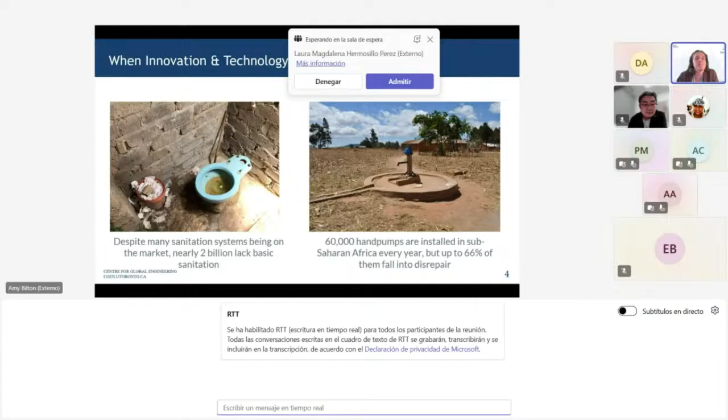When you're thinking about these types of solutions, it's really complicated. A good case study that shows how complicated and nuanced these things can be is the case of the play pump. I don't know if many people in the audience are familiar with this, but at first glance, it's something that might seem like a really great idea.

And actually that's what happened. This idea was first presented back in the late 80s at an agricultural fair in Africa, and it's quite simple. There are a lot of places that lack access to water, and a lot of places where kids also need something to do, some place to play. The idea behind the play pump was to put those two things together.

The idea is that you'd have a merry-go-round which kids would push and spin around, and that would pump water up to an elevated water tower. Later, when someone needed water, they could open the faucet, get some water, and take it home to their household.

A lot of people thought this sounded like a good idea at the time. It won some World Bank Development Awards, got funding from the Clinton Foundation, and was really well received.

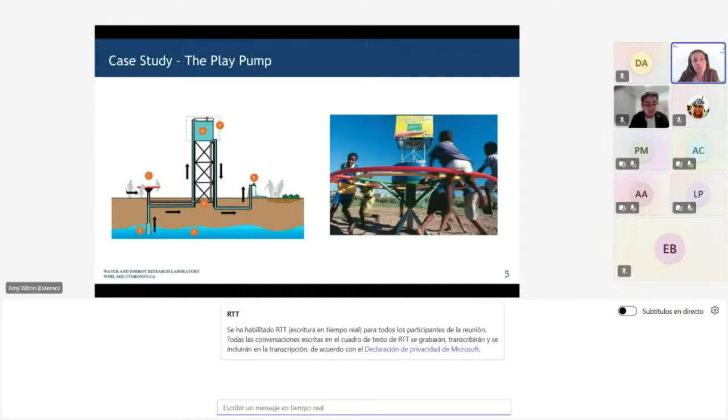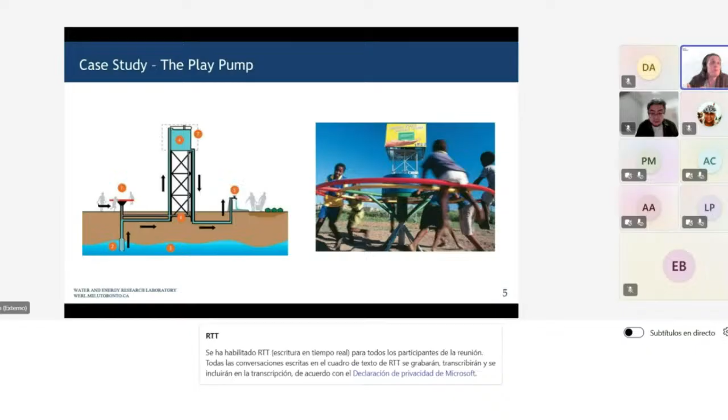From an implementation perspective, it also didn't make a lot of sense, because the kids would use it for 10 minutes a day. What happens if someone arrives at this watering point and there's no access to water? It's usually a woman collecting that water, and she would have to basically spin around a kid's merry-go-round to get the water she needed. So from a social perspective, this is very degrading and a big issue.

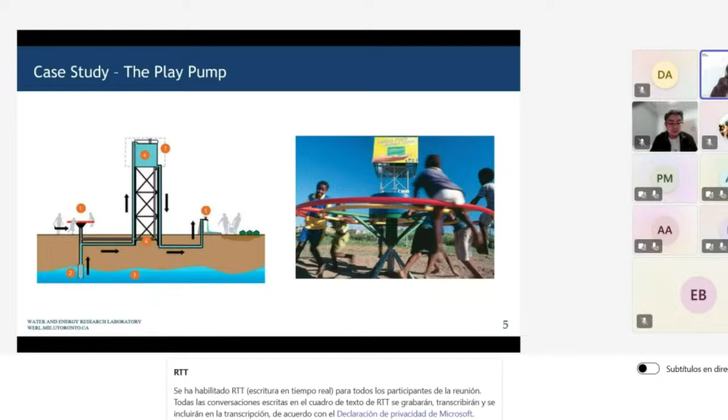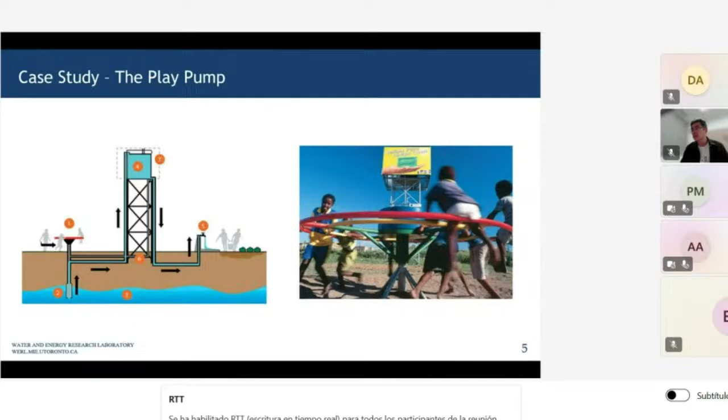There are other issues as well in terms of implementation. This was seen as a big failure in many respects - it sounds like a great idea, but it didn't really understand the full problem or consider the holistic design, both engineering design and actual implementation.

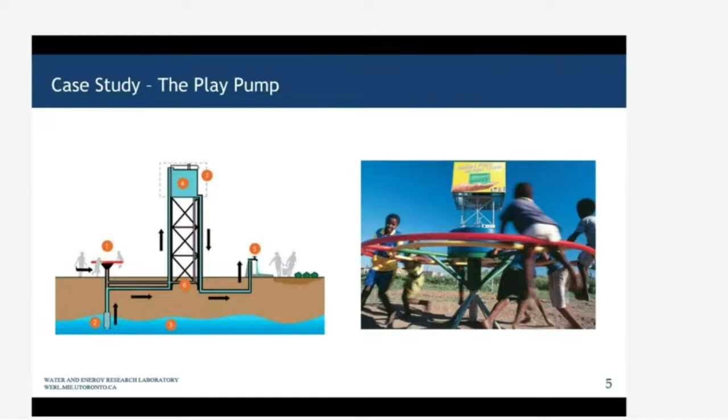So in my work, and in the work we're doing in my group, we try to think very holistically, not only about the problem and the technology, but how it fits into the particular location and structure. Many technologies which have been developed really miss the mark, and don't really address what is the core problem.

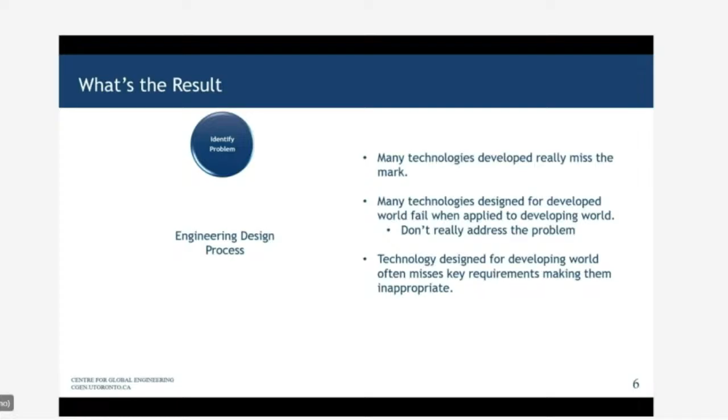So really, when my work, we think about really trying to understand fully what the problem is, and not just try to stitch something into a particular context, but really trying to think about defining that problem and being able to think about which technology has the most potential to make an impact. Sometimes that involves developing something new, which really comes from fundamental elements of that problem.

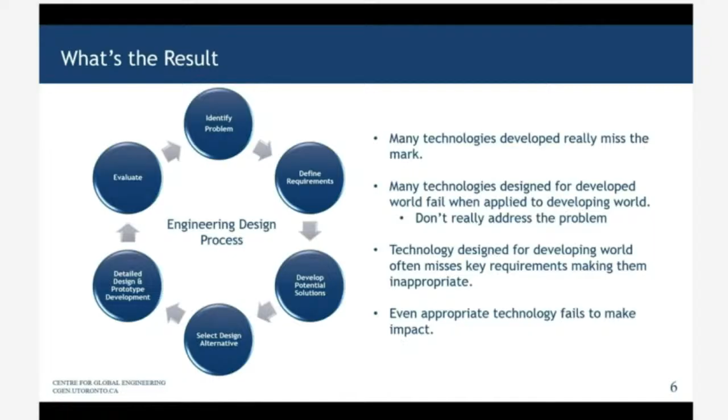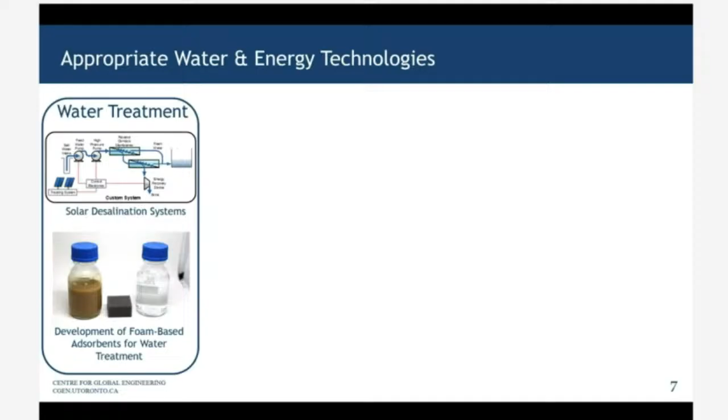My group, we do a wide range of things and work on a wide range of different technologies, from thinking about technologies for improved water treatment and materials for those types of technologies, from desalination and foam-based adsorbents, to thinking about integrated energy technologies, to how water can be used more efficiently in agriculture, and also the overall design of these types of systems in a way which is going to gear the technologies to have the most impact.

I'm going to focus in on some technologies in the last two categories in the talk today, and these are projects which are currently ongoing and things that are really our current topics within my own research group. So I'm going to start by talking about some of the work that we've been doing, thinking about smallholder farmers and thinking about using water efficiently for many of these smallholder farmers.

In the initial phases of this work, we were actually doing some collaboration with some communities down in Nicaragua. And in Nicaragua, there are communities which have very large and long dry seasons. But many farmers were actually setting up their own technologies to deal with these types of conditions.

This is an example of one of those farmers who had installed their own very simple drip irrigation, was doing some reforestation, where they had these bottles with small holes in them that were dripping water at the base, and also had set up his own diesel-powered pump to pump groundwater up to an elevated tank that then he could put through drip irrigation on his farm.

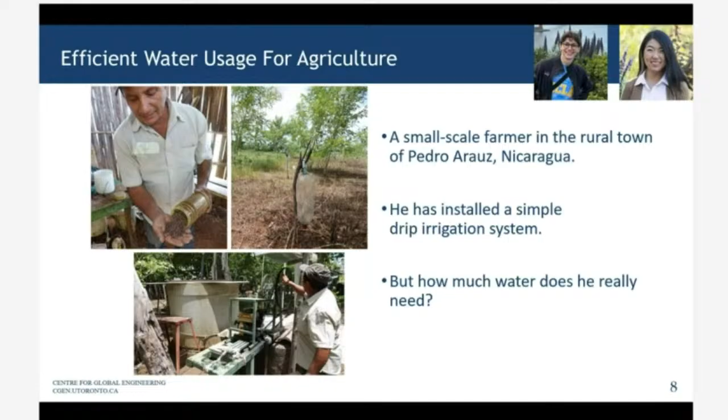This was a problem we spent a lot of time going through, interviewing many farmers in this area, approximately 50 to 60 farmers, to try to understand that context. Many of them were mostly subsistence farmers, and we're transitioning towards these types of drip irrigation systems.

They didn't necessarily have a stable access to electricity. They didn't have a whole lot of electrical tools or expertise, but they did have a lot of knowledge about how to set up and use plumbing systems in their particular farms.

So we worked and we defined this problem. And being engineers, what we'd like to do in my group is we'd like to start just really understanding the physics of what's going on when growing these crops and irrigating these crops, to see what we could think about for some sort of sustainable technology which could improve Juan's, or these different farmers', water efficiency and water usage.

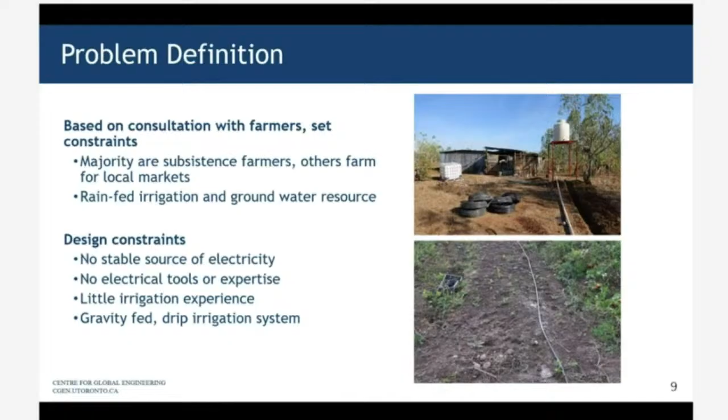And when we were actually looking and understanding the fundamental physics, we looked at what was going on in the soil. So as plants grow in the soil, they have to be able to pull the water out of the soil in order to grow. And they have to pull with a pressure which is bigger than something known as the soil water potential. So if the soil is really, really dry, there's very little water in that soil, and the plants aren't able to draw up. The plants like the soil to be somewhat moist.

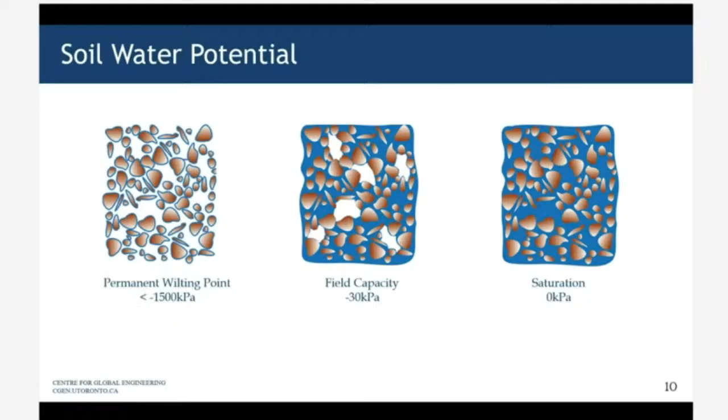Where plants usually like to grow, they'll need to be pulling with a pressure of around 30 kilopascals. And if the soil is completely saturated with water sitting on top, the soil water potential is going to be 0 kilopascals. So we were thinking about this. We learned about this property, soil water potential, and recognized that this is essentially a pressure. And we thought to ourselves as mechanical engineers, is this something that we can exploit when thinking about an appropriate technology for irrigation?

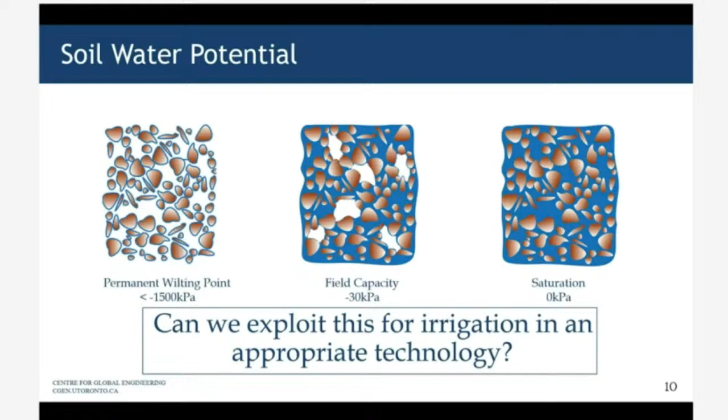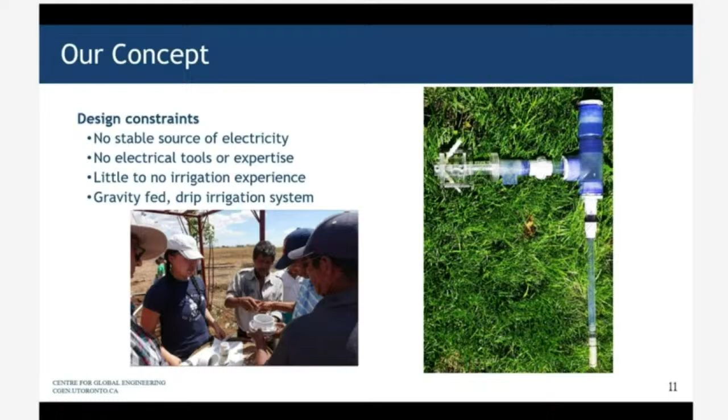One which would meet the constraints of having little to no use of electricity, no electrical tools or expertise, and just some very basic plumbing knowledge. We were able to develop a very simple mechanical concept which could regulate water usage for this particular case.

I'll show you a little bit of how the fundamentals of this technology works. The idea behind this system is that you have your irrigation system, and an irrigation controller which has this valve here, which can control the water coming from an elevated water tank to the drip irrigation network. This valve is controlled using this very simple mechanism.

What we have is a ceramic tip buried down in the soil, connected to a water column and a water reservoir here. What happens is this controller sees very similar forces to what a plant sees.

If the soil becomes dry, water is drawn out through this ceramic tip, and that change in pressure will pull back and open up this mechanism, allowing water to flow from our elevated tank to our drip irrigation network.

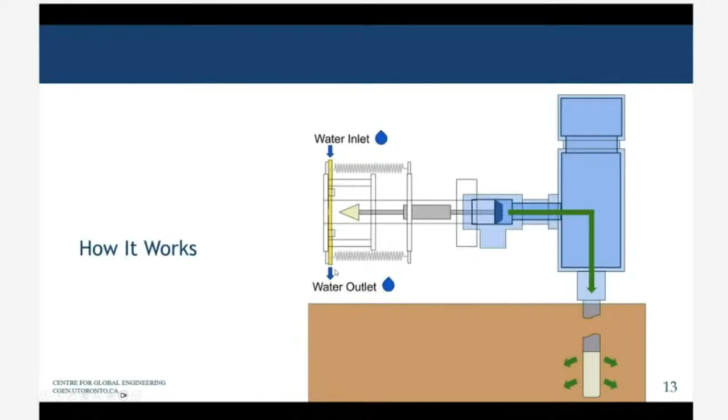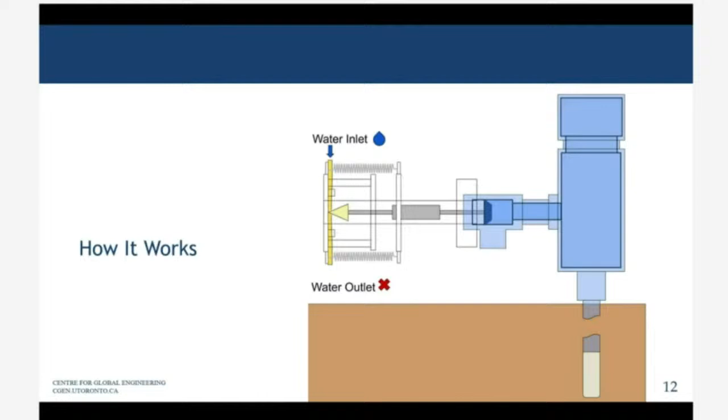When the soil becomes damp, it essentially goes in reverse, and water will flow back in, and the valve will close. So the idea is that we can create an irrigation controller which uses the same forces a plant sees to regulate water flow into the irrigation network.

We're in the process of actually building this out right now, showing its efficacy and doing some work with farmers to understand how this would be adopted.

This is showing some of the testing we've done. This is the first testing, done in a greenhouse in Toronto, where we installed the controller and compared its usage to a simple timed irrigation network and timed irrigation system.

This plot on the left shows the basic operation of the system. As the soil pressure goes down, the controller pressure also decreases, the valve opens, water flows into the soil, and the pressure goes up, closing the valve again—this pattern regulates water flow into the irrigation to match the crop's needs.

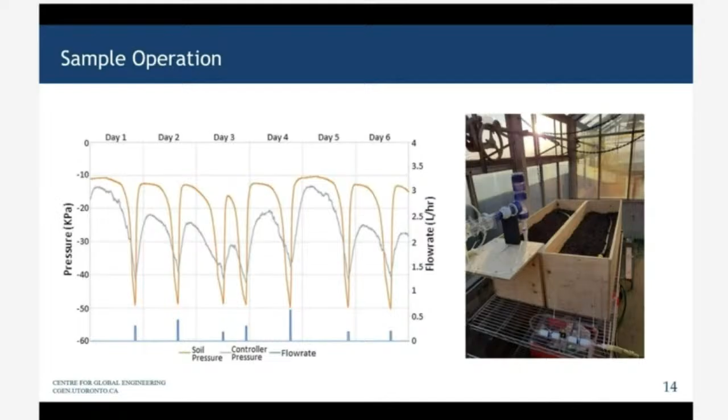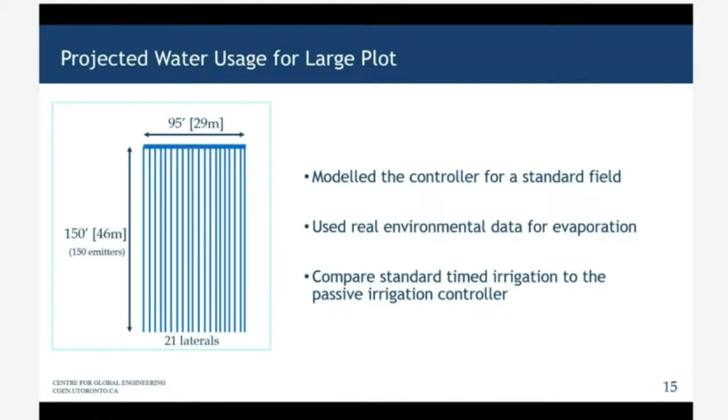We've also done studies looking at what happens when we take this out to a larger plot and compare it to standard timed irrigation. We took real weather data from a site in Toronto and did this comparison between timed irrigation on the left and our passive irrigation controller.

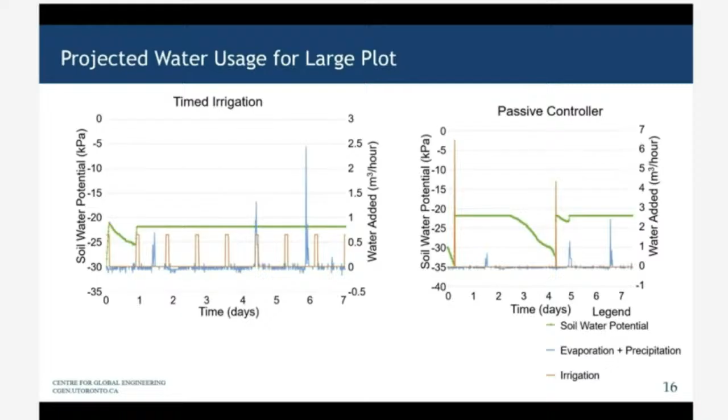You can see in this case there was actually some rain happening at the same time. Our irrigation controller over this course of 7 days only had to open 2 times to maintain soil moisture, and was able to save about 75% of the water usage over what the farmer at that site was doing with standard timed irrigation.

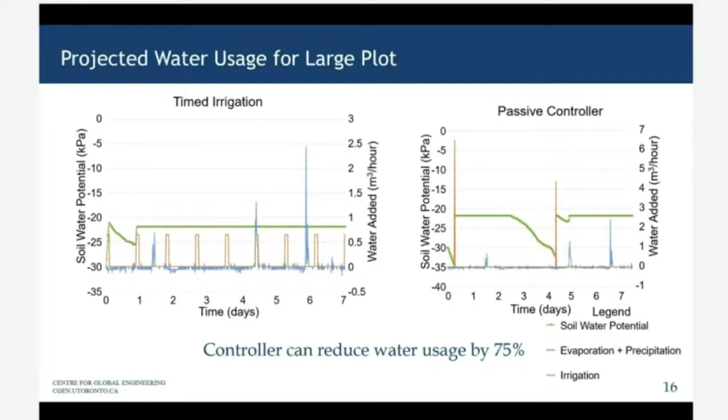So we're in the process—this is a project currently ongoing within my group—of refining the design of this valve and doing some things to allow adjustments in the operating pressure, as well as planning for a local field test.

We've also developed a partnership with a UN agency in Morocco which does work with farmers. We will do a controlled field test with that UN agency to assess performance, as well as adoption studies with farmers to understand their opinion of the design and what barriers might exist towards farmers taking up and adopting a design like this.

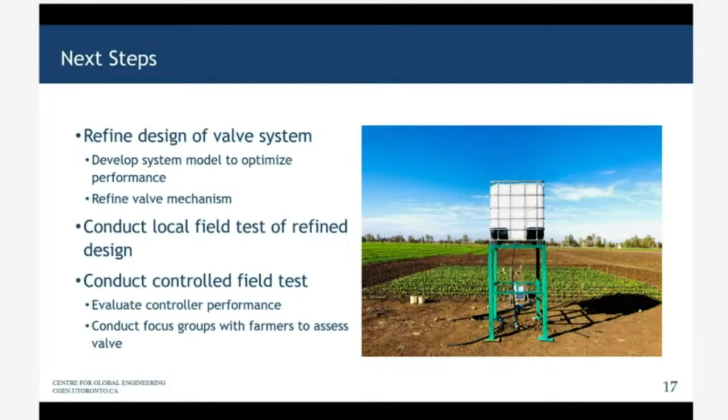So this is an example of one of these types of projects we're doing in our group. Now I'll talk about another project going on within my group, which is looking at sustainable sanitation.

This is some work of a recently graduated PhD, Pablo Cotara, who was thinking about sustainable sanitation for sites, working with many communities, including in Mexico, which lack piped water and sewage. This is a picture he took during his own field work in and around Mexico City.

In Mexico City, there are many places like the one in the image that Pablo shared here, which lack piped water and sewerage and are actually prone to flooding because of the high groundwater table, and also have relatively high medium to high population density. So this is a challenge for these sites without piped sewerage.

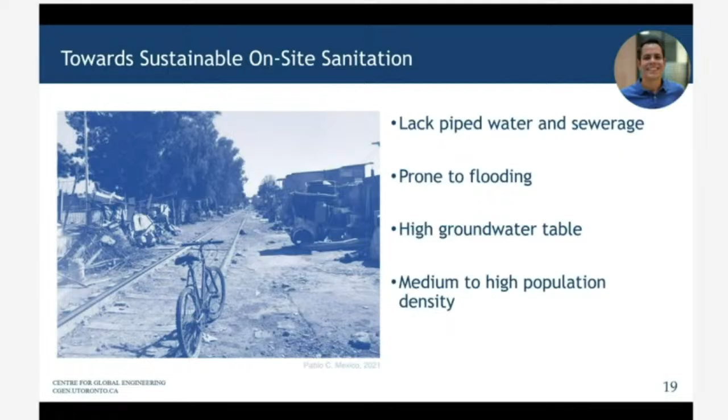So he was exploring whether dry toilets could be a feasible sanitation solution in these particular sites. Through some of his initial feasibility studies, he saw maybe it could make sense.

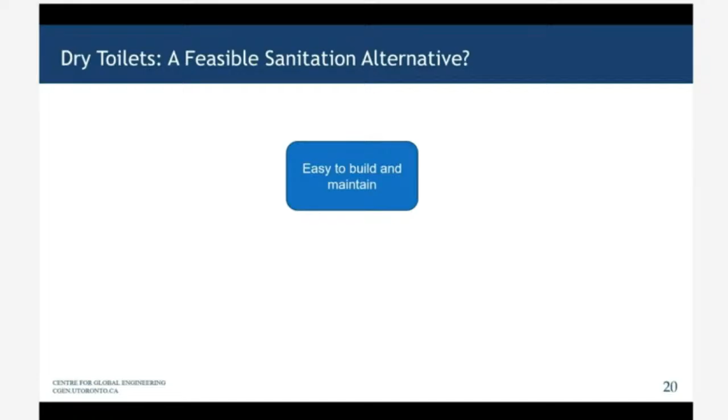These types of dry toilets, and I'll show you a schematic of what we were talking about in a moment, could be easy to build and maintain. If there's a dry toilet, it doesn't need any flushing water, which is critical in a place that doesn't have piped water. There could be some local availability of the dry materials needed. You could think about managing the actual waste from the dry toilet, either on-site or potentially off-site.

And we could think about taking the output of the dry toilet and activating it through composting, which is something that could also be done somewhat locally.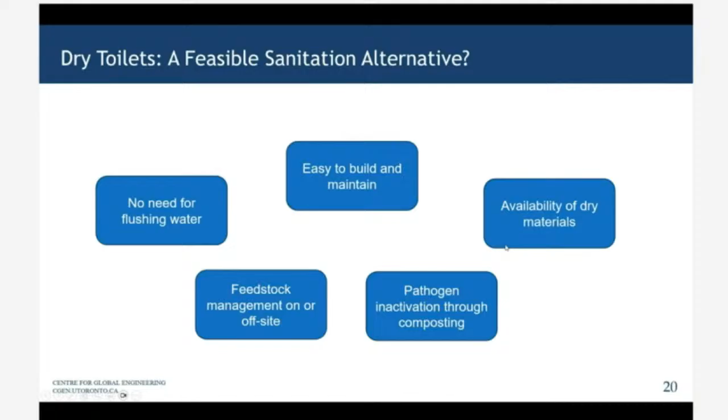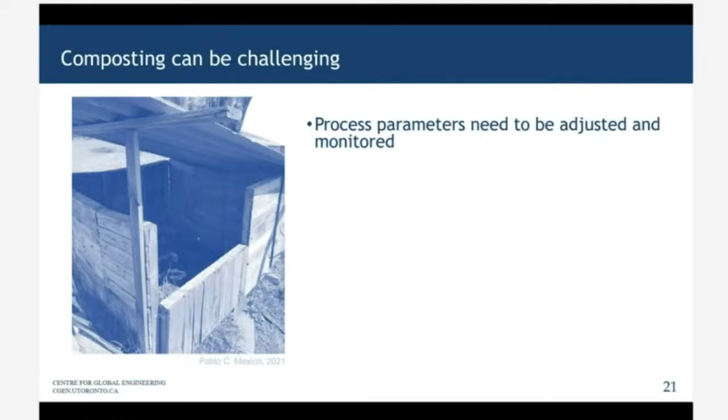So part of the challenge in implementing these dry toilets, if we were going to put all these pieces together, is that composting can be challenging in this type of environment. These environments can be pretty dense, and a lot of times the process parameters need to be adjusted and monitored to get the temperatures you need for pathogen inactivation. To get that type of temperature, you typically need something quite large, which would require a lot of stakeholder engagement and potentially long times for pathogen inactivation.

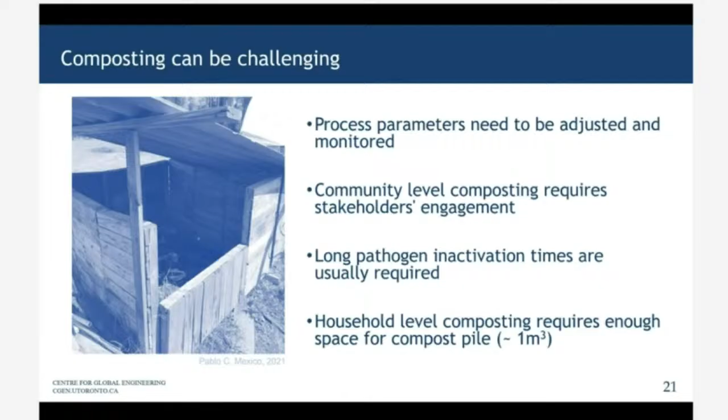Traditional guidance and literature says that for this type of composting for dry toilets, you would need a compost pile about a cubic meter in size, which is really big. In many of these population-dense areas, that could be a potential challenge.

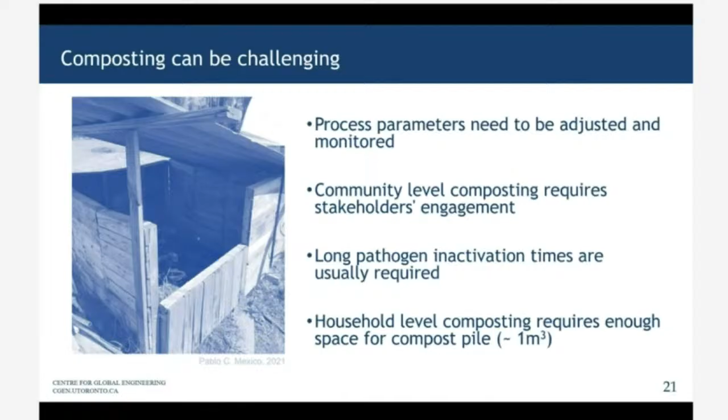So we thought maybe dry toilets could make sense, but this was a big barrier — the fact that if we were going to achieve pathogen inactivation in the waste from the toilet, having these big compost piles was a big barrier.

So this is the structure we were thinking about, and we wanted to see if it's possible. Can we think about a structure where we could have a toilet that would look something like this? The idea is that you would have your toilets structured in a certain way so that when someone used them, the feces would go into one container. There are existing structures within the toilet bowl that enable relatively good separation between urine and feces, so you could have the urine in one container and the feces in another.

Potentially we could think about using something that would be about 60 liters, which could work quite nicely for a household in terms of the amount of time you would need to manage this and the frequency needed.

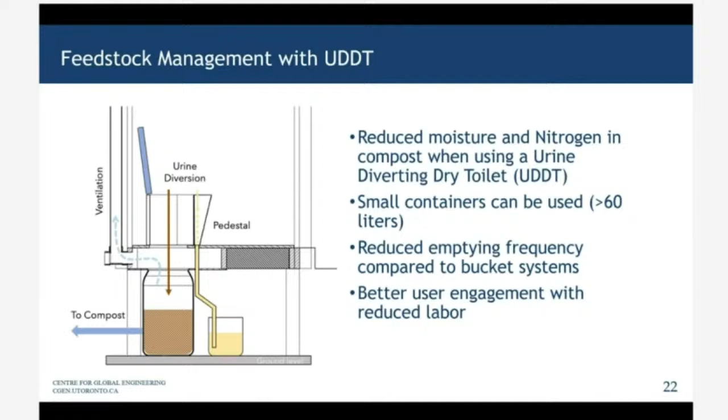But the problem is that if we were going to use a structure like this, most of what literature said and showed for reaching pathogen inactivation in this type of composting relied on volumes of about 1,000 liters. We wanted to see if we could do something in the volume of about 60 liters.

And we wanted to see if we could get it into a range to achieve pathogen inactivation. What we wanted to do in the composting process is get the temperature high enough for long enough that it kills off the dangerous pathogens that could exist in the feces. What has been shown in literature is that to do that, you need to get high enough and long enough to be in the top right-hand side of this image here on the left.

To safely get into this image, we chose a design requirement that we could hit: if we could reach 1 day at 50 degrees C, we'd be in a safe zone for successful composting at smaller scale. So in this research, we wanted to see, could we get this compost from 1,000 liters down to 60 liters?

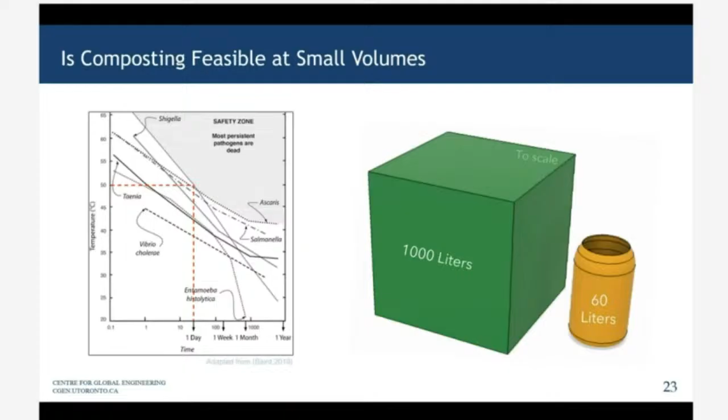In order to do that, we started with something quite fundamental, breaking it down while also wanting to make it accessible. So we developed an analytical model, which was quite simplified, and we wanted to see if this could help guide us.

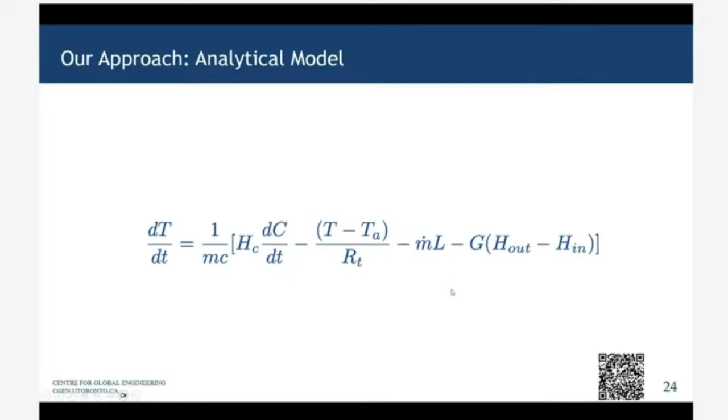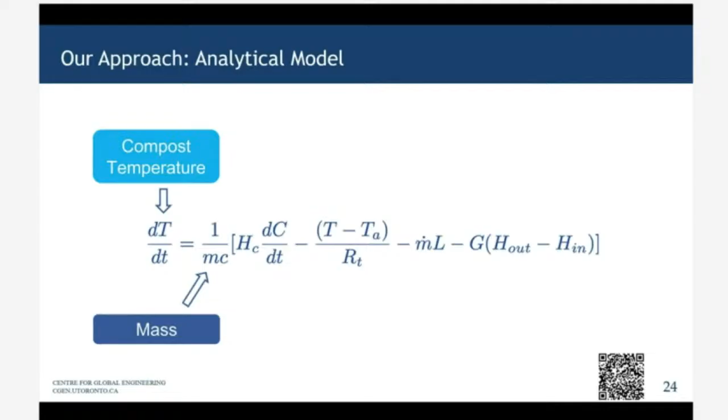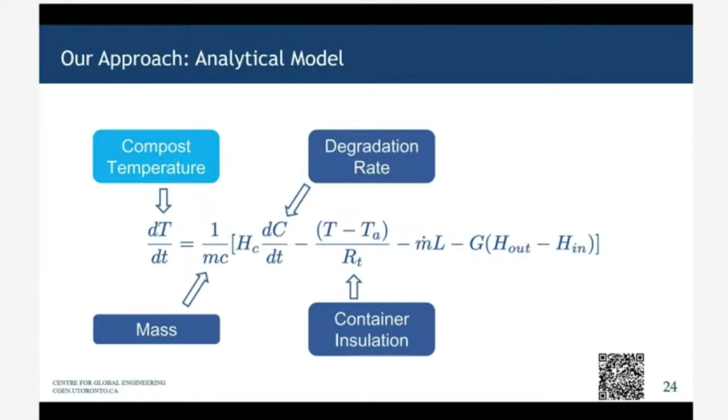Toward getting this type of small compost reactor, which would open up this dry toilet technology to the household scale. This model, shown on the slide, is quite simple. We're looking at the individual terms to understand the compost temperature and the rate it changes, as a function of the mass of compost, the degradation rate, the container insulation, the evaporation rate of water from the compost, and G, the aeration rate - how much air we're putting into the compost. We boiled it down to this relatively simple equation to understand whether we should try to size this down.

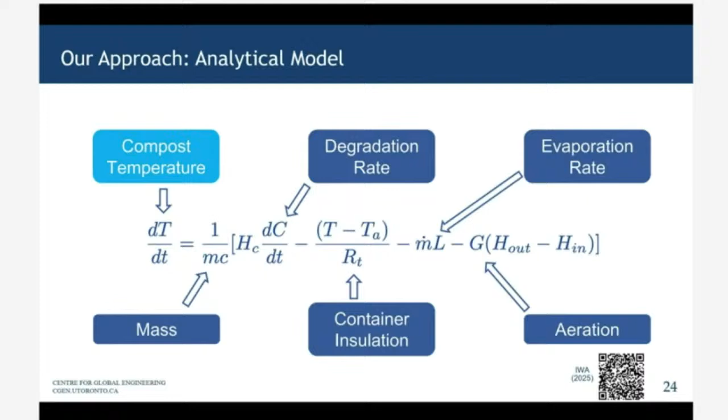This is a relatively simple equation, but there are a lot of unknowns in it. So we also set up a small experimental setup to understand this model and see if we could characterize what some of those variables were in our equation overall.

This figure shows the experimental setup. On the top left is our compost reactor, filled with feces and some dry material like sawdust. We installed temperature sensors throughout the depth of the compost, and to provide aeration we had a pipe going down through the center, driven by a very simple computer fan.

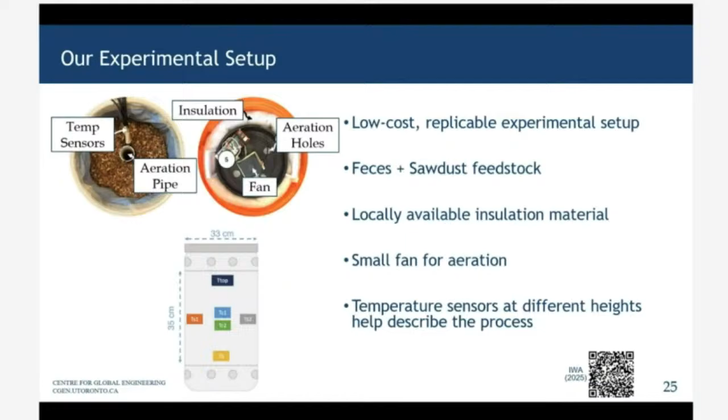With this model, we ran the small compost reactor in a relatively small experiment, wanting to see how small we could make this mass while still reaching that safety zone of 55 degrees C for 3 days. We started with smaller experiments, running one with about 2.4 kilograms, a certain insulation on our container, and a certain airflow rate for aeration.

We ran those experiments and used the data to fit our model. The experimental results are shown with the gray line here, and our fit is shown with the black line along with some bounds on uncertainty. The model is able to fit this relatively small volume quite well.

But then we wanted to see if we could use this model to understand where we wanted to go. If we wanted to reach 55 degrees C for 3 days, what would we need to do? So we adjusted our parameters in terms of mass, thermal resistance, and aeration rate, and predicted where we wanted to go.

We predicted, and then actually ran that experiment where we predicted we wanted to be, to reach that 55 degrees C for 3 days. We predicted we needed to go up to just over 5 kilograms and reduce our aeration rate to get those pathogen inactivation conditions.

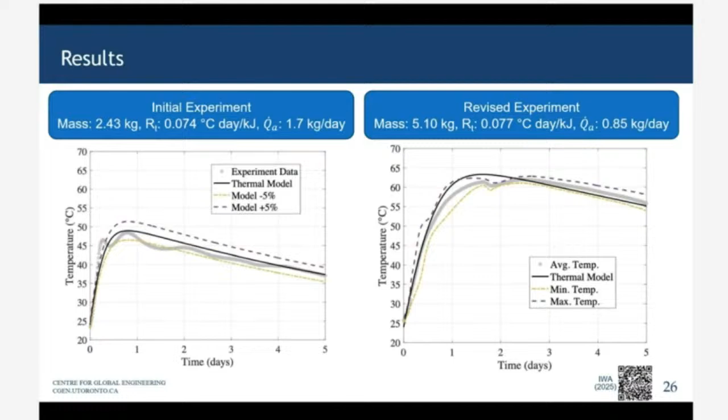The figure on the right shows that the model for these other conditions also matches pretty well, and with those conditions we were successfully able to achieve pathogen inactivation with a relatively small mass and volume. This is the first time, with a very simplified case and very simplified equipment, that we've been able to do this kind of small volume, accessible composting for dry toilets.

So we are actually working to think about how we can translate these results to different agencies, to think more about the design of these types of dry toilets.

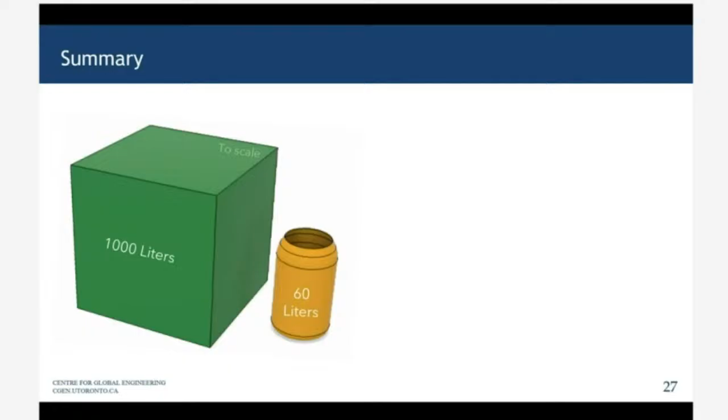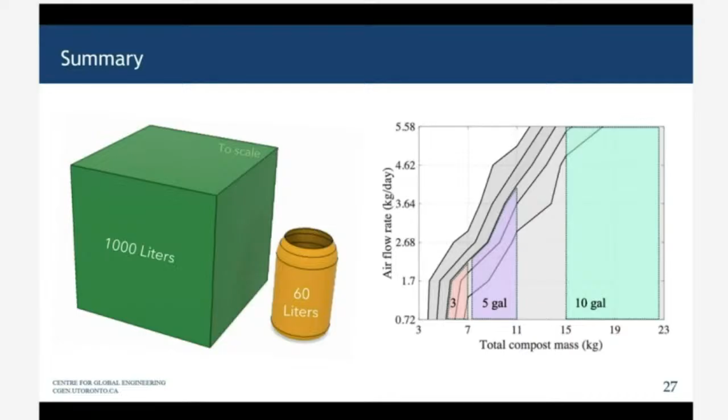And we've also done a range of studies to try to understand what are the design bounds on different sized reactors and aeration rates, to be able to have feasible configurations of these dry toilets that will meet these pathogen inactivation conditions.

I'll touch on one last example of a project currently going on in my group before taking questions. This project is really about closing the design loop, thinking more about technology after it's been developed, how it's being used in a particular context, and if it's being appropriately adopted. This is a project supporting an organization in Mexico called Isla Urbana, thinking about how we can ensure technology is adopted in the best way.

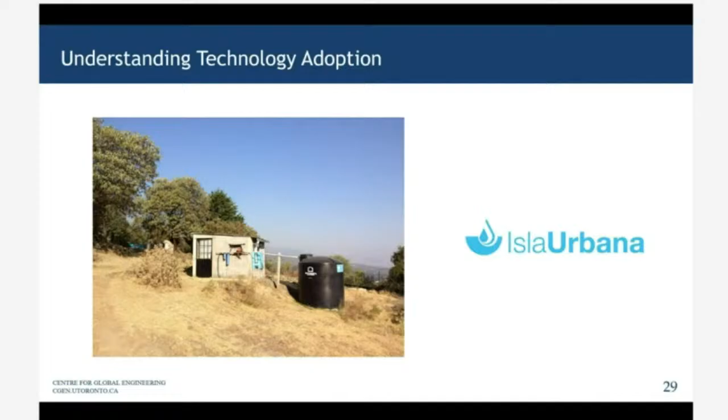This work really began a few years ago with one of my other students, Sacha Rizante. We were doing some work on different agricultural technologies at that time, and we wanted to think more broadly about this question of adoption. There are a lot of people developing technologies out there, like the irrigation controller I was just talking about, but we don't want to just develop a technology for the sake of developing it. We want to develop a technology that's going to be used and have the most impact.

In Sacha's work, we tried to understand whether there are trends in terms of different factors that influence whether someone adopts a technology or not. We started by going through data from the literature on agricultural technologies, looking at things like the demographics of adopters, and the financial conditions of potential adopters, to see what influences whether someone uses a product long-term.

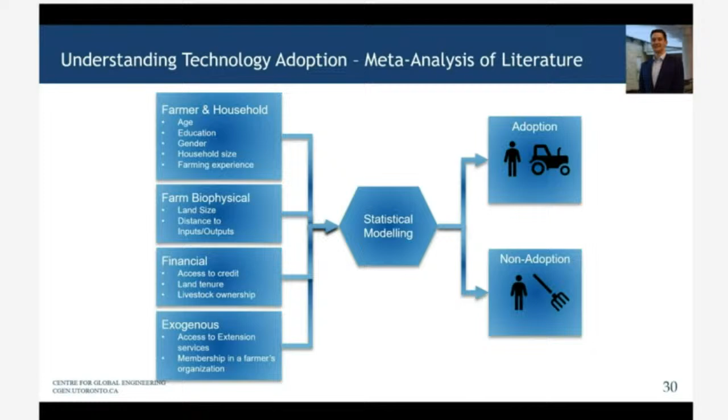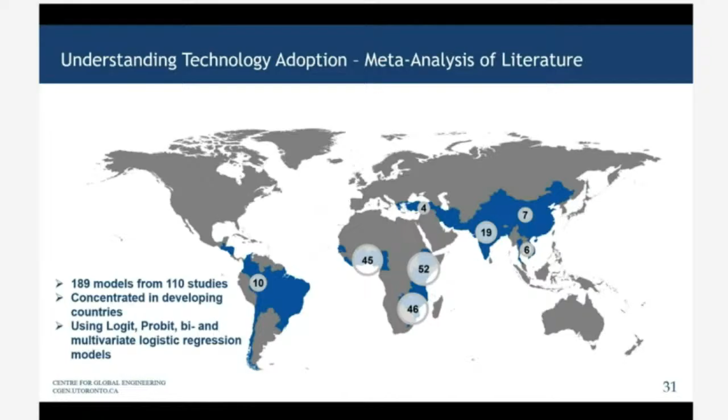We did a number of analyses on these studies, looking across different technology categories, different geographies, and different socioeconomic factors as well. Part of the challenge of doing this work was that we needed some way to put all these different factors together and look at the influence of the factors on the potential of being adopted.

To do that, we developed something called the odds ratio - a ratio where, if it's greater than 1, the probability of adopting is increased if some condition is true. For example, if someone had 5 years more education than the average, would the probability of adopting be higher? Yes, there was some influence in terms of that factor.

But across all these different factors, we found some small relationships between different factors and the probability of adopting particular technologies. There's a small relationship between access to credit and adopting technology, and between land ownership and adopting a technology. But the biggest factors were whether someone had access to extension workers - people who would support implementation of the technology - and whether they were members of a farmers organization or other organization where they might have support.

So we found some factors had more probability of adopting a technology, but overall the relationships were not super strong, and really it was the context which was the most important piece.

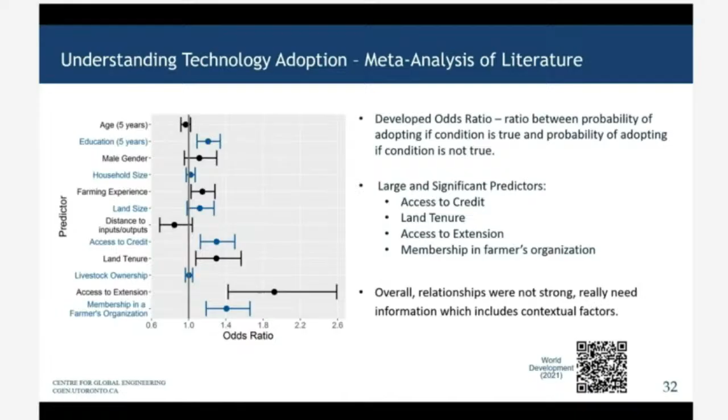We've taken this to start thinking with some partners about going more in-depth on technology adoption. Since contextual factors are so important, we've been zeroing in on particular technologies and contexts - that's what we've been doing alongside Isla Urbana. This is some work of students Erin Rudy and Adriana Patino, really thinking about water access within Mexico.

I started off the presentation talking about UN Sustainable Development Goal 6, and in Mexico there's a significant number of households which are lacking sustainable access to water.

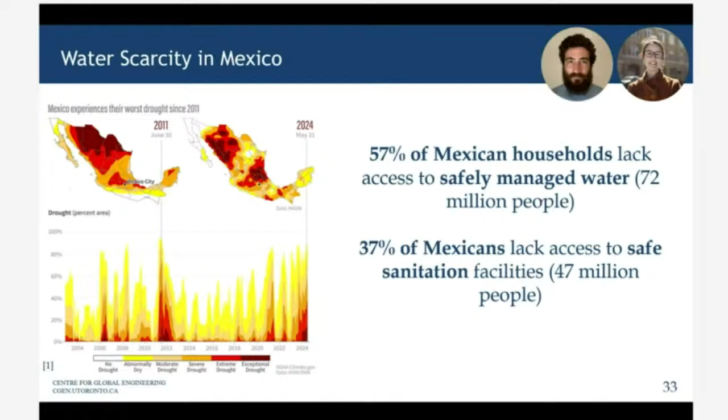In this context, there's been a push to think about the potential of decentralized infrastructure. In Mexico, a lot of households rely not only on intermittent pipe systems, but also on trucked water and bottled water. But there are challenges there.

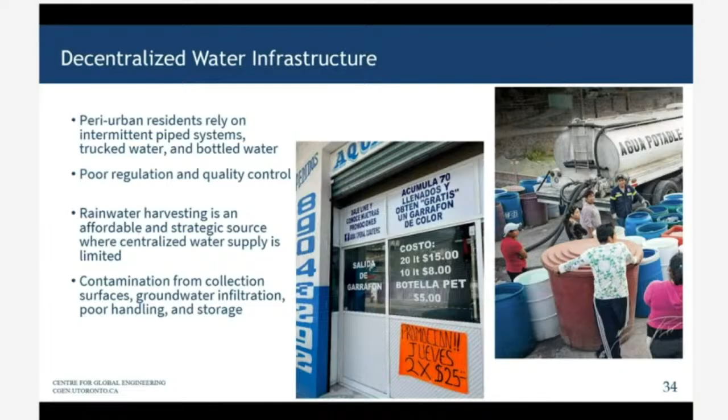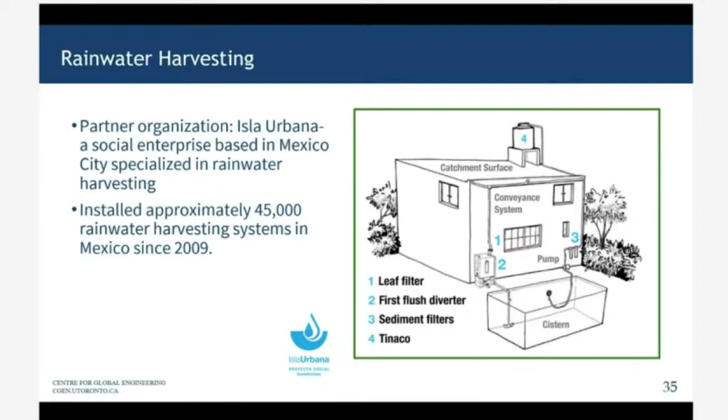We're working with Isla Urbana to understand more about adoption within projects they've done. They've been working in the state of Jalisco, near Guadalajara, and have installed over 8,000 rainwater harvesting systems in the past several years. We wanted to work together with them to understand what's happened since they installed those systems a couple of years ago.

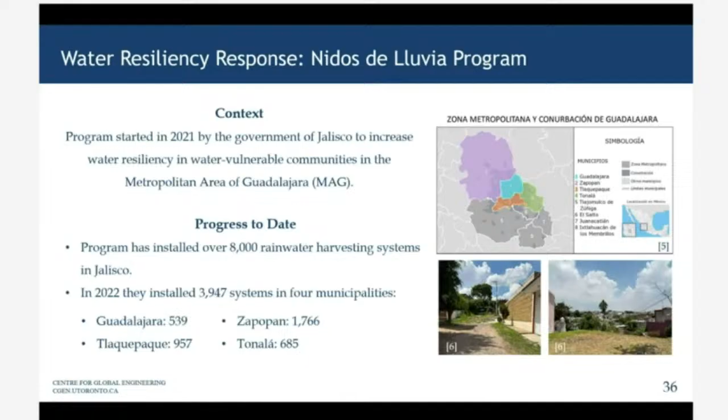We wanted to understand a few things: are the systems still being used? What are the perceptions of the users of those systems? And also trying to understand more nuances about what the household's knowledge is of those systems, and also the quality of the water actually in those systems.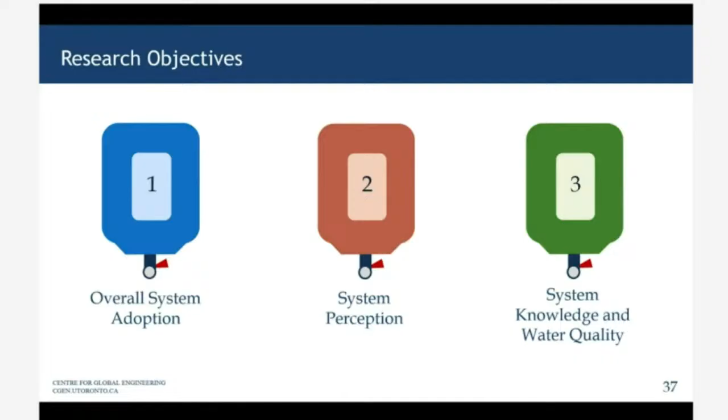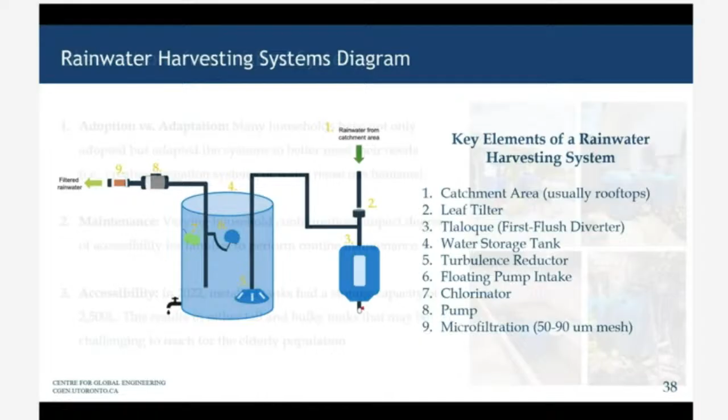The questions were about whether households had adopted and were still using the system. We found that many of the households were adopting these systems, but there are different levels of actually adopting. Adoption is not something which is only binary, which is often talked about in the literature.

Many households, and really what would be considered the people using the systems best, had not only adopted the systems but had really adapted them, changing them to meet their own needs, creating other mechanisms to reuse some of the water from the first flush diverter and other elements as well.

We also found, as mentioned, that adoption is not necessarily binary, and there are differing levels of maintenance in many of the households. Sometimes this was a result of the fact that some of the setups were not necessarily super accessible. Some were rather tall and bulky, and those were things which would be challenging for some of the elderly population to actually maintain.

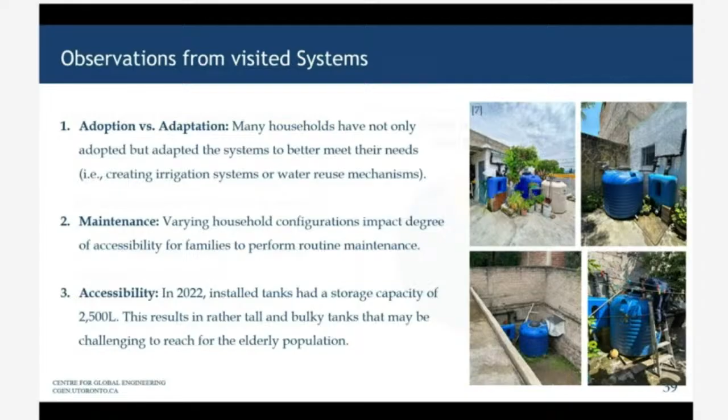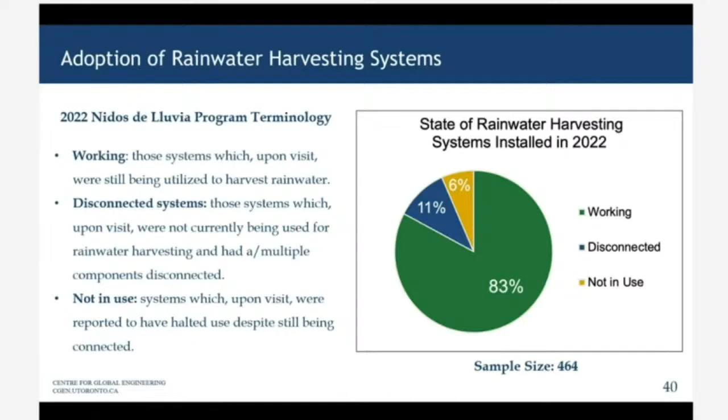Looking at the results of the overall survey, we did find that most of the systems were still set up and still working, still being used to harvest rainwater two years after installation, which is great, so these would be considered as being adopted. For the ones that were disconnected, most households said it was because they were in the process of doing some remodeling or changing things around their house.

One thing we found when looking through these systems is that there was a lot of variation in the quality of water harvested. We wanted to understand more about the factors influencing how well someone was using and adopting the system. We classified the different quality of water using a visual assessment, and you can see the distribution here. There were some households with very clean water, but across a spectrum of overall water quality in the storage of these rainwater harvesting systems.

We wanted to understand a little bit, at least from our survey, about what might be influencing the different usage of these types of systems. One of the things we asked in our survey was about the knowledge of the system. We asked people to describe to us how the system worked, and we found some very interesting results.

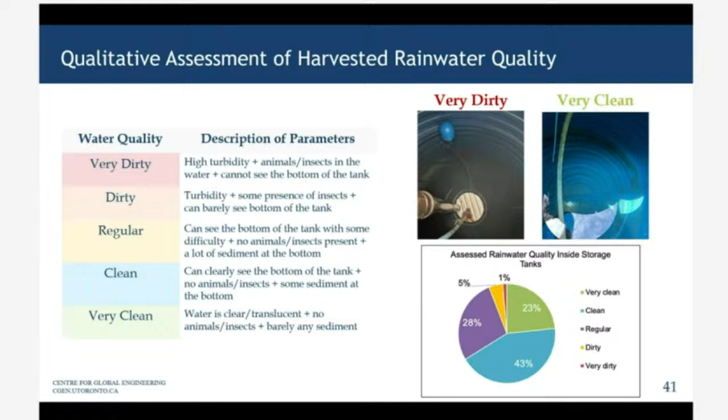We found results that showed there is a correlation between knowledge of how the system works and the actual water quality in the tank. We found this using a chi-square test, where the figure on the left would show if there was no correlation between knowledge of the system and water quality. But the figure on the right is what we actually had.

If you take a look at some of the data, this dark blue line represents households which had correct knowledge of how the system worked. You can see very little—there were no households with very dirty water, and maybe one household with dirty water. Most of those households, for people that knew how to correctly describe it, were clustered toward higher water quality, versus households with incorrect knowledge, whose distribution was skewed more toward dirtier water.

So after going through and doing the statistical analysis, we ended up with a statistically significant correlation between knowledge of the system and water quality.

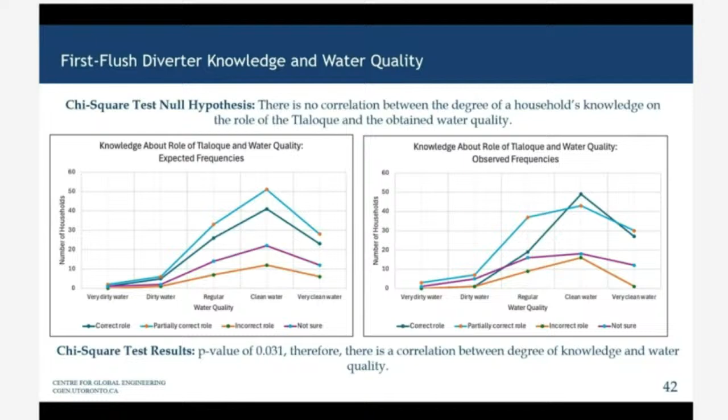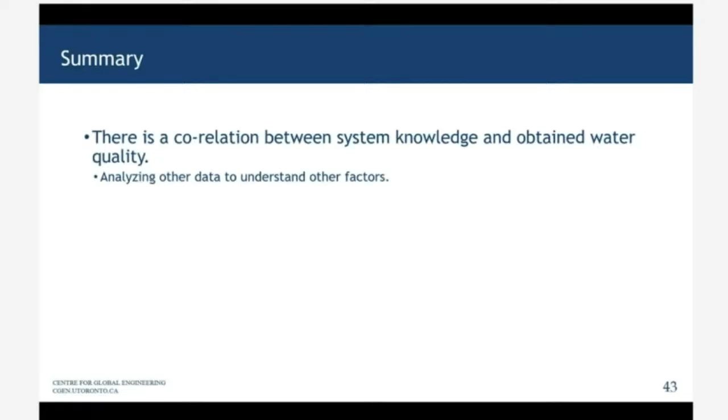So we're thinking more now with Isla Urbana about how we can take this to the next step. We're analyzing some of the other data within the survey to understand what other factors might be related to water quality. There's also a desire to understand how different training and design influence adoption and adaptation of these systems.

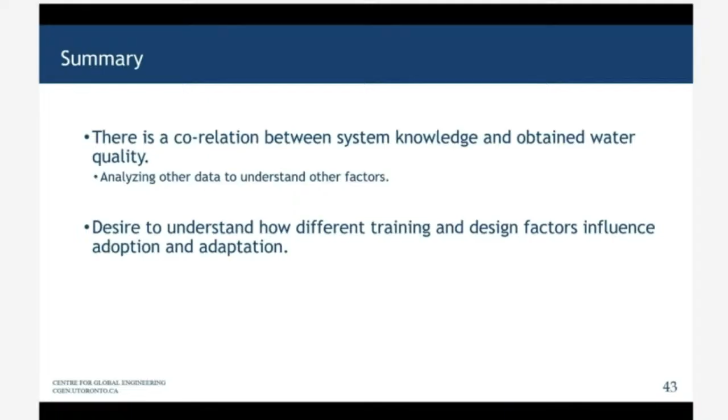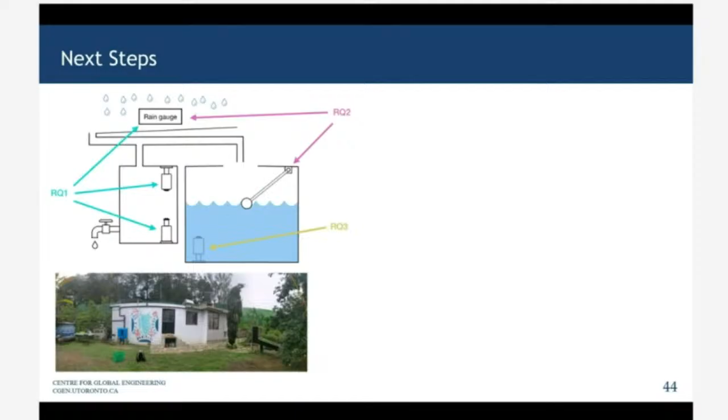So in order to really understand this in our next steps of research, as an engineering research lab we've been looking to understand more in-depth nuance in how these households are using these systems. We're actually working with Isla Urbana to do some instrumentation within these systems and understand really how they're being used.

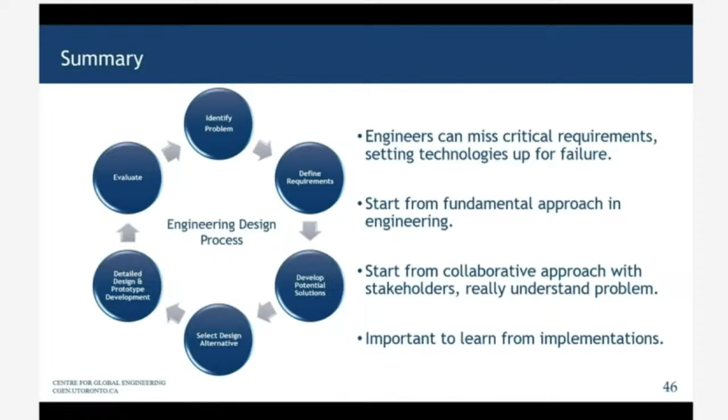This is a quick summary of the work that's been going on within my own research group, thinking holistically through this design process—starting with the fundamental approach, and then thinking about how we can close the loop to develop appropriate technologies to improve access to water in marginalized areas. This is just one project within the broader Center for Global Engineering at the University of Toronto, where we think about how to educate people to think broadly about these types of problems affecting vulnerable populations. I want to thank my great team for this overall work.